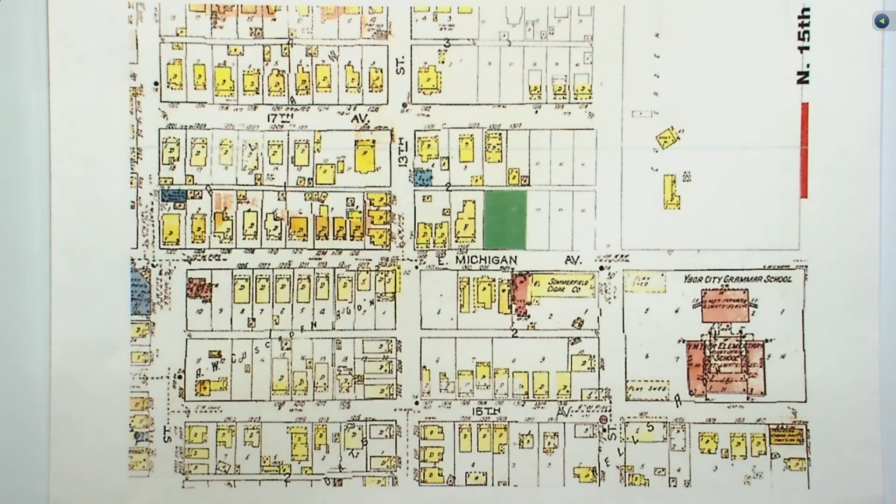Going through a quick photo presentation, this is the Sanborn map from 1929. The area in question is highlighted in the green parcel. In 1929, it faced Michigan, which today is Columbus Drive. To the west you have 13th Street, and to the east you have 14th Street. To the back of the parcel, in 1929, there was an alley.

Going to a more current overhead, you see the large parcel in question. It's a little larger than what we're normally looking at. We have Columbus Drive in the foreground. The alley has been vacated, so there is no alley, and all vehicular access has to come off the primary street.

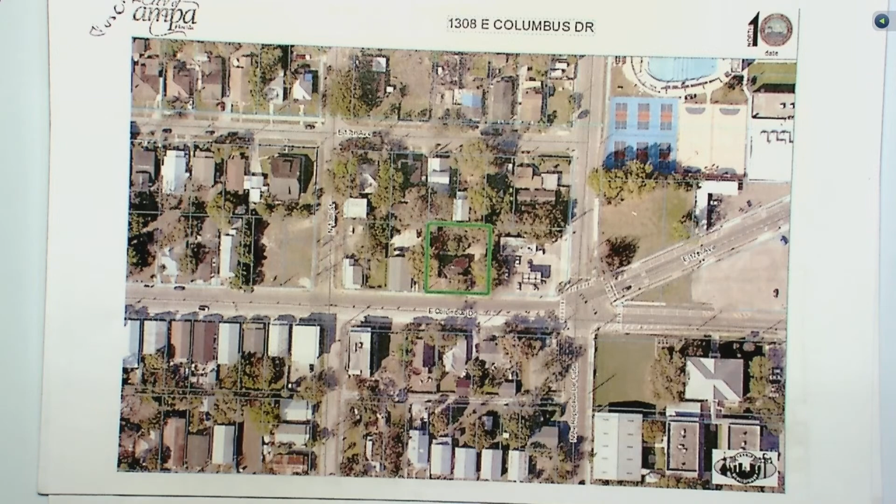This is looking from Columbus Drive back into the subject site. There are some trees in question. Natural Resources have looked at the site plan that you're going to review this morning, and it is suitable for an approval.

To the east, you have a convenience store. To the west, you have a duplex that this board reviewed and approved. Directly across the street, you have some fabric that's indicated on this photo. And to conclude, a couple of street shots: this is looking down Columbus Drive towards the east, and in the other direction, Columbus Drive to the west.

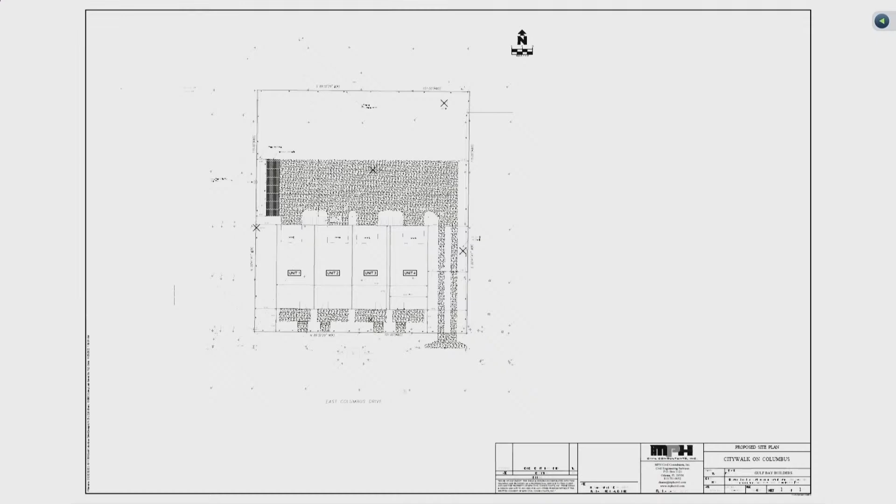The site, if I may, I also have some larger boards I'd like to put up. The front setback is aligned with 1306 Columbus, which was a project we did a couple of years ago. As Ron mentioned, the alley's been vacated, so our access is through a ribbon drive on the east side of the property. Parking and garage access are in the rear. Because of the size of the property, we have a large green area in the back. The AC equipment will also be contained in the back of the property.

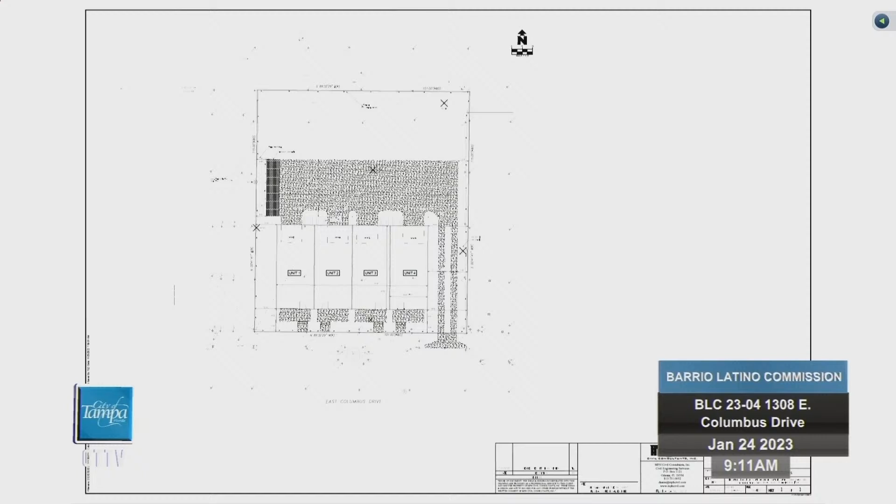It's kind of hard to tell, but a lot of the trees you saw on a previous slide will be removed because of their condition. There's a large tree on the property line with a severe lean to the west, towards 1306 Columbus. Staff recommended removal of that tree, and I've also spoken to the owner of 1306 Columbus, who was overjoyed, especially after the last storm went through — he thought it was coming down at that time.

This gives a perspective of, fortunately, the size of the property allowing a lot of green space. I've come before the board several times before where I didn't have the luxury of this type of green space. The finished floor elevation will be at 24 inches, exactly what the 1306 East Columbus Drive structure is.

The ribbon drive will have historic scoring of 3 foot. The parking area and drive access in the back will be scored with a 5x5 scoring pattern. On this slide, you can see some pervious concrete. There is one tree back here that we are proposing to save, and staff recommended the use of pervious concrete on the west end of the parking area.

We are proposing a fence; however, at this time, as with previous applications, typically we wait until we're a little further along in the project and we get with Ron and staff to present what we'd like to do for fencing. There also is a retaining wall. I'd like to move on to the next slide.

This is the front elevation. You can see we have some retaining walls that will be in front of each structure. We're still finalizing the design, but they will be either concrete or some sort of metal fencing.

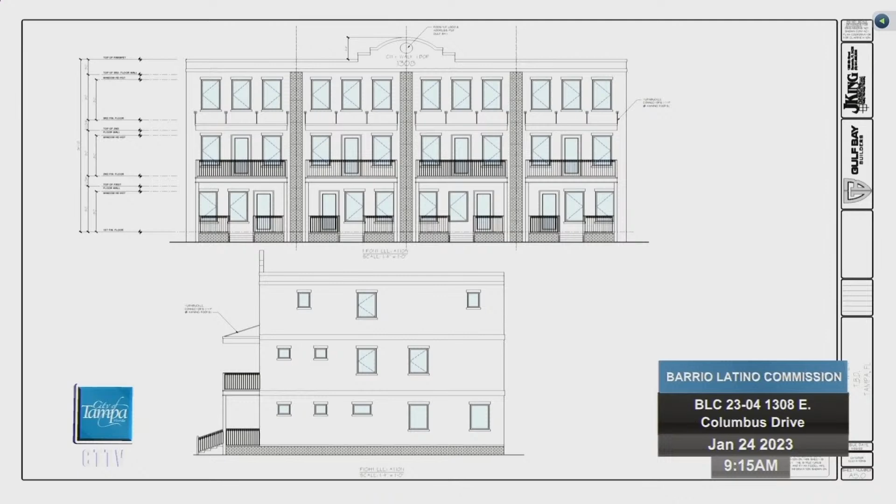So moving on, each floor is 9 foot with a 24-inch floor joist system. So the overall height of the building, leading up to our parapet wall, we're still below the allowable maximum height. Just more architectural details of the back of the building.

This slide shows that we're proposing to bring the brick around on the stem wall on each side. You can see how it wraps around the east side as well as the west side.

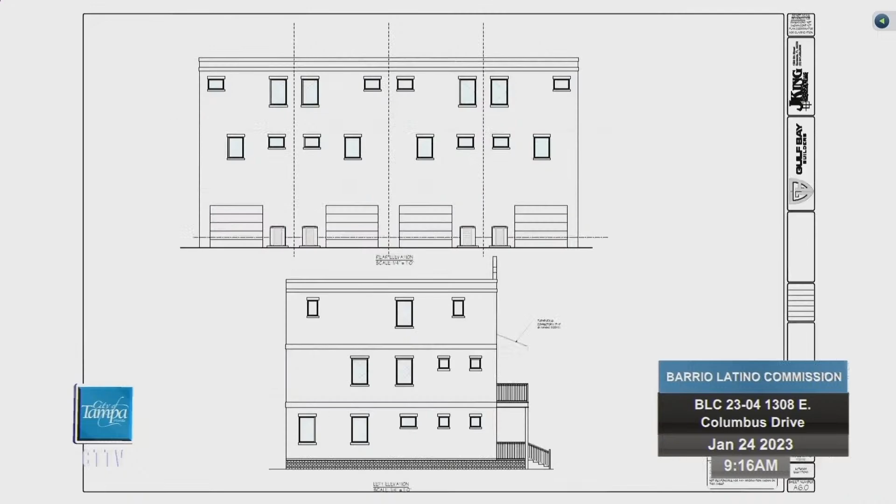Moving on—I don't know why that's upside down—but the building wall section shows the stem wall, our railing, and balcony system.

During some previous meetings with staff, it was mentioned that typically each building kind of had its own identity. So we've developed kind of a logo that we would like to have on the front of the building, tying in with the fabric of the neighborhood.

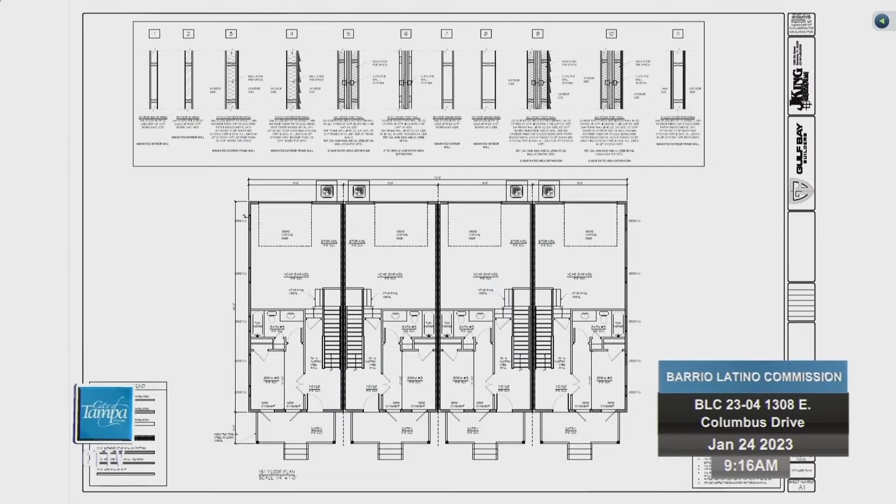This is just the floor plans.

Proposed building materials: we've used the Jeld-Wen windows on all of our previous projects. We're proposing to do a casement window, which would be a wood-clad window, and we've had very good luck with this. It's a customized window that we use for the Ybor district.

This is some of the materials we've used on previous projects. It's a Therma-Tru full light glass door, which would be 8 foot, and then we use the Schlage Century hardware.

The brick that we're proposing is a smokehouse. It's Hebron brick, and I have the sample with me, it's called Smokehouse. Sand finish stucco. And then the roof system, it looks flat from the front, but with the parapet wall it does have a slope, and we've used this VFI silicone system on our previous structures that are constructed this way.

We've selected the exterior color palette. The roof, of course, would be white—you can't see that from the road. The brick is smokehouse, kind of a gray. The exterior paint walls would be white snow, and we've used the exterior trim color, which is called tricorn. We've used that on some previous projects in the district.

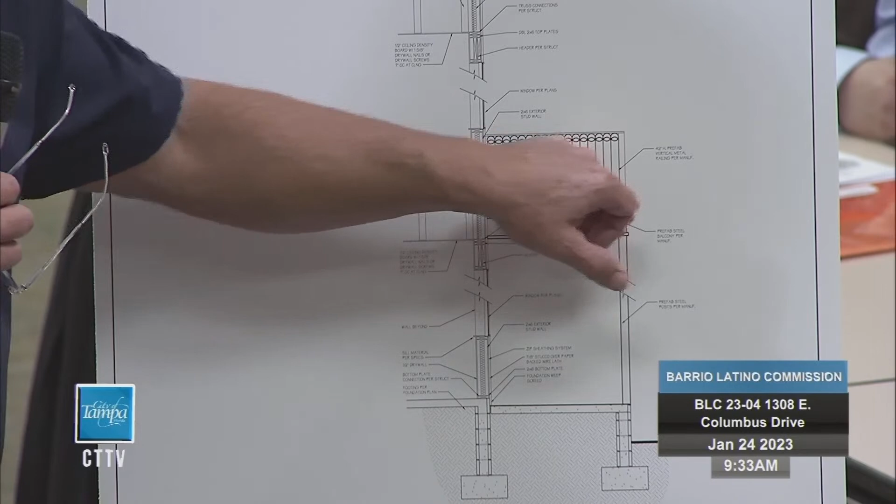And then we've got the brick that's going to be going up. The balcony system, again, is metal. We'll have some light gauge I-beams here. The railing system we've already decided on is something that we've drawn from some other projects in the district.

And then continuing up to the third floor, there again the windows and the exposed banding around the windows is quite pronounced. Coming up to the parapet wall, which is where we'll have this proposed detailing, kind of announcing the building and giving it some historic texture. It's kind of hard to tell from the renderings, but the stucco banding is quite pronounced, and there would be additional control joints in the front as well, besides just the brick.

Great, thank you. No further questions for me.

The only question that I have, and you may have discussed this and I missed it, was there's a notation here under the conditions to revisit operation of the window so as not to impede the porch use on the first floor. Can you talk a minute about what that issue was and how you addressed it?

So on the first floor here, there's two windows. We were going to make one of them a fixed glass window, and the other one would still be a casement window to meet egress. On the previously proposed plans, both windows were operational, so we took one into fixed glass. And that will be on all four units? Correct. Okay, that's all I have.

Thank you. And then what we did on the second floor is, because we have the door, these two windows would now become fixed glass as well, since we don't need those to be operational, as there's a door for egress. Thank you.

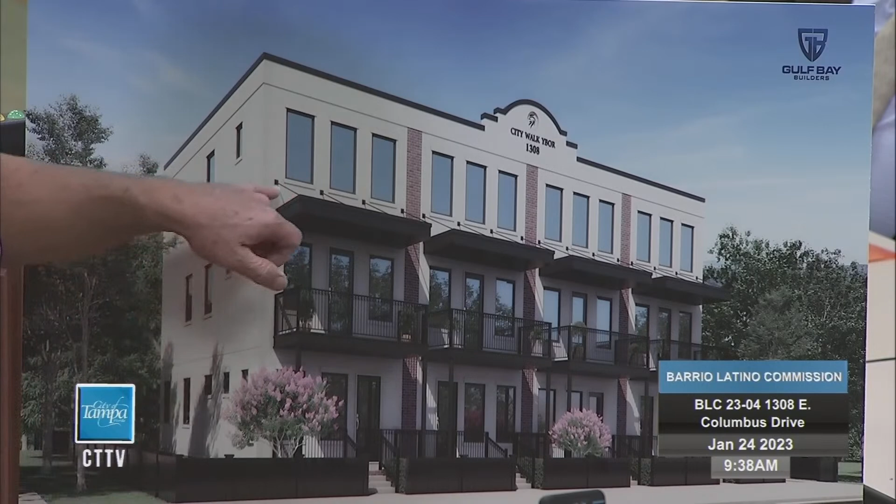In fact, I think Ron had mentioned that to me. We just have to be careful with this. Yeah, I think that tieback might help frame the front elevation a little bit more. It's either you have the pediment, and I know, I've seen your historic examples, your references throughout the district, and brick is kind of not really in there, but it's alluded to. I think that would be a good move to kind of tie it in and grab those corners.

So I see eyebrows, they're everywhere, right? You have the sills and eyebrows pronounced everywhere? Correct. I think,

Talk me through the process of wanting to do casement windows on this project. Just for the light, and looking at some of the inspiration photos that we drew on. And as I mentioned, these are custom built for us up in Pennsylvania that we've used extensively throughout the district. Just wanted to use casements. I haven't used them, and since a lot of these will be fixed glass, that's why I would like to use the casement just to get more light, especially on these end units.

Okay, wanted to try to get as much glass. Yeah, I think in general in the district, we typically see them more like 1/1s, like on that 3rd floor level. It just seems like it's a broad expanse of glass with no definition, if there's a top and bottom. Is that something they could do, like applied muntins or something like that? Yeah, and I think because when you look at your other projects, a lot of them are all 1/1s.

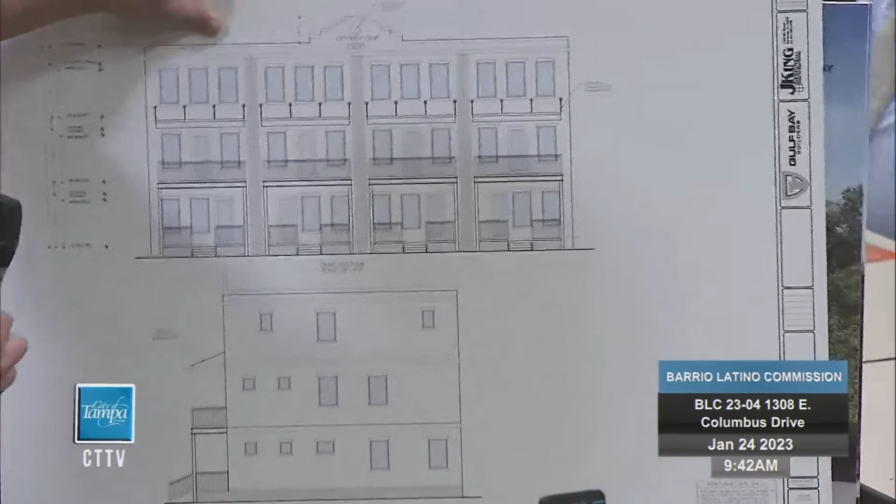Yeah, it's like starting from the left, you have twos on the bottom and then one going up top, and then when you get to the third series of windows, they're not aligned. It'd be nice to shift that over and work on it.

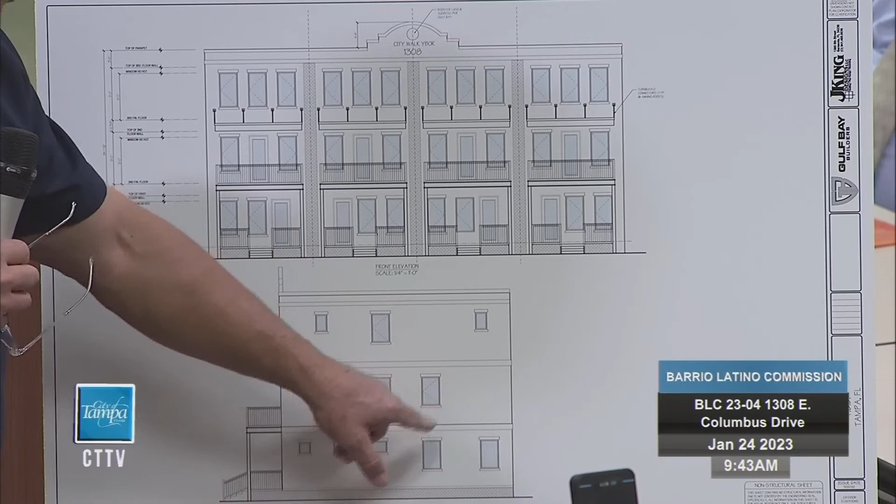Right, this window is on the third floor. There's 2 master suites on the third floor, so that would be over the commode area, just like this one is over here in this other suite. And then these are actually on the second floor. This is part of the dining area here.

Yeah, just like on the first floor, that small window, the third one doesn't align. This one here? Yeah, doesn't align with the two above, and it might be a simple shift over, and maybe that top right window. Okay, I see. Yeah, so I think that's something you can work with staff, you guys can take care of it, but I just think you might want to simplify that, maybe work on getting things in alignment a little bit more.

Now on your wall section, the casement windows, they look like they're front glazed and pretty close to the finished stucco. Is that accurate? Is that driven? No, they're a thicker... there's a thicker sash. Right, but the glazing here, like if you look at the middle one, the glass is all the way to the outside instead of being centered within the wall. And I'm wondering if that's a function.

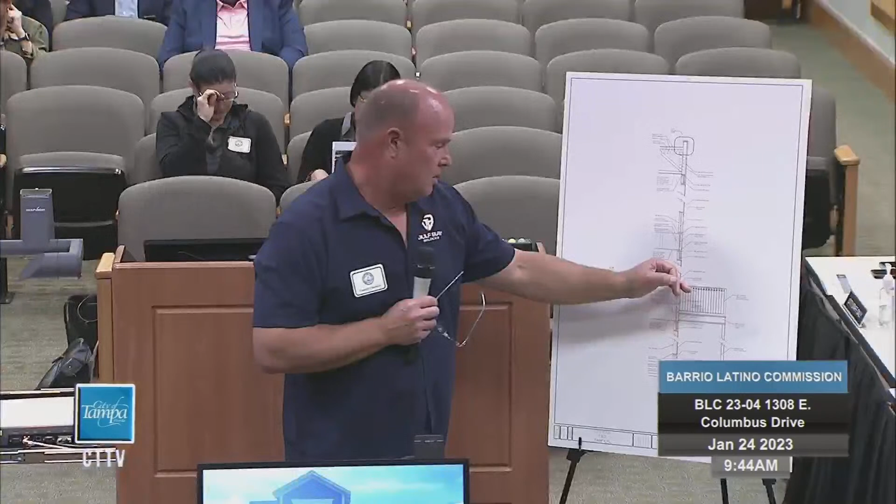No, the actual sash is going to be thicker than what it's going to protrude. Right, I'm talking past the wall. The glass looks like it's all the way out on the sash. Yes. So this, okay.

So you have a couple things working against you — you have a broad expanse of glass there, using the casement windows with no definition, no breaking it down to smaller units, 1 over 1 or whatever it may be. Plus you're pushing glass all the way up to the exterior, so that's gonna be a little bit too much, in my opinion.

So typically in frame construction, you'd like to see that glass more towards the center of that wall. That'll help not make the glass as prominent an element. Because you have two things — that broad expanse on the casement windows, and then you're pushing that glass all the way out. So I think a couple things could be done to pull that back into the building a little more, make it more recessed, give more definition and depth to the windows, and then maybe try to break that up into smaller units.

And all the windows are gonna be dark bronze, like the railings and everything else? There again, because they're customized, they can make them. Let me grab the...

A little handy dandy custom Goldwyn color. We were thinking either... they have just a black, and there's also... you kind of want it to match the railings and the balcony, correct. The ones you typically see, they call luxury bronze, but they also have something called chestnut bronze. But we'd want to get something a little bit darker than just the bronze.

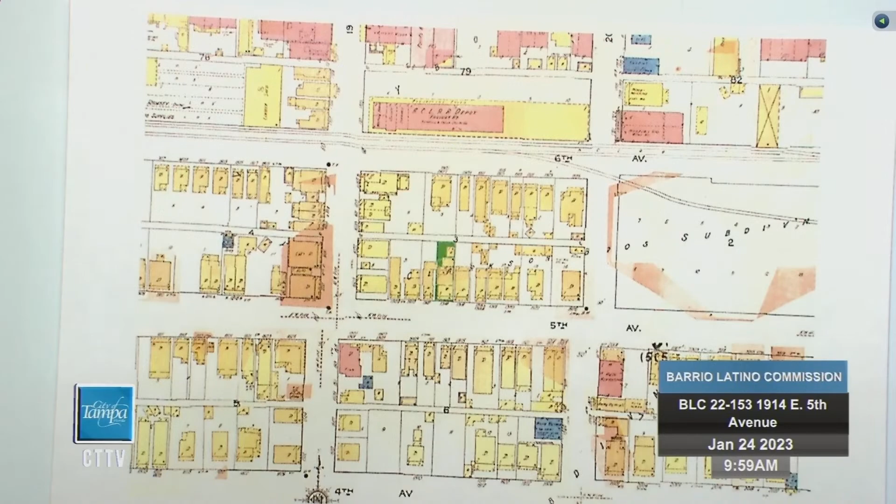Moving to the photo presentation, starting with the 1929 Sanborn map, the property in question is highlighted in green. Showing the fabric along 7th Avenue in 1929, you see the proximity of the structures to each other, the closeness and the urban environment. The property does face 5th Avenue. It's between 19th and 20th Street, which run north and south, and there is a functional alley. In 1929 there was an alley, and currently there is an alley today.

The alley is very important, once again, as it fulfills the travels of the vehicle. This parcel is only 25 by 95 in dimension, so to get access from the primary street would be very difficult.

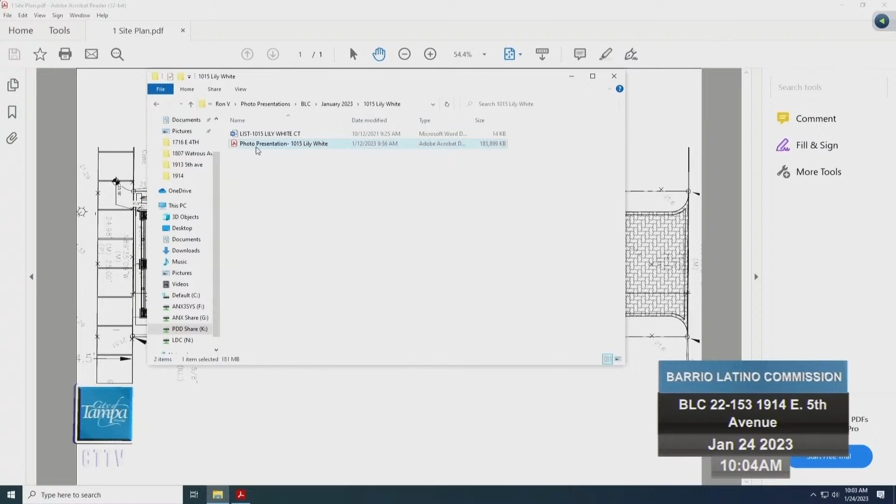The back setback will be 32 feet. The 32 feet that I took for the back setback was in order to have 24 feet from the complete alley and 18 feet for the car, so that a car can back up in that area. AC pads for the 2 units will also be proposed at the back of the unit.

There is an existing sidewalk in front of the property. The new sidewalk will basically be this connection you see here, because this part is existing. The sidewalk will just be this connection to get access through the side to the front porch.

The stair for the front porch will be 24 inches high with 4 risers and 3 treads. The front porch finished floor elevation will be 24 inches high. That is according with the average setback of the two houses located on the west side, which are 1912 and 1908.

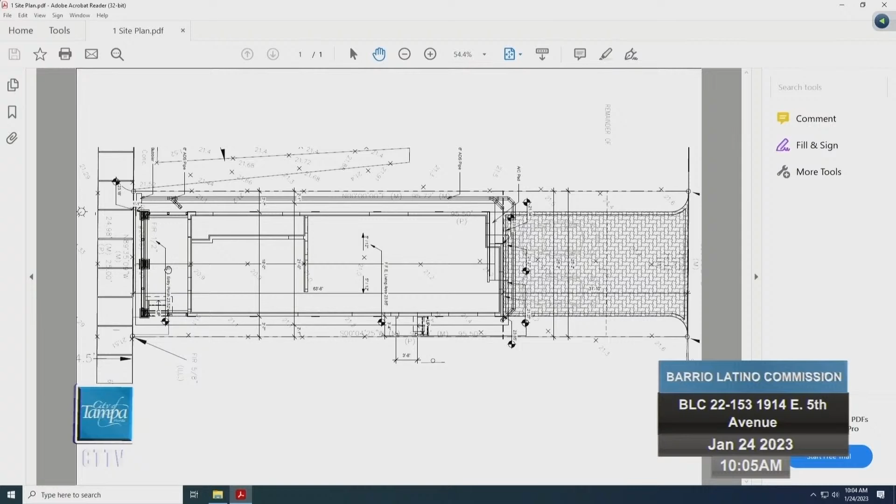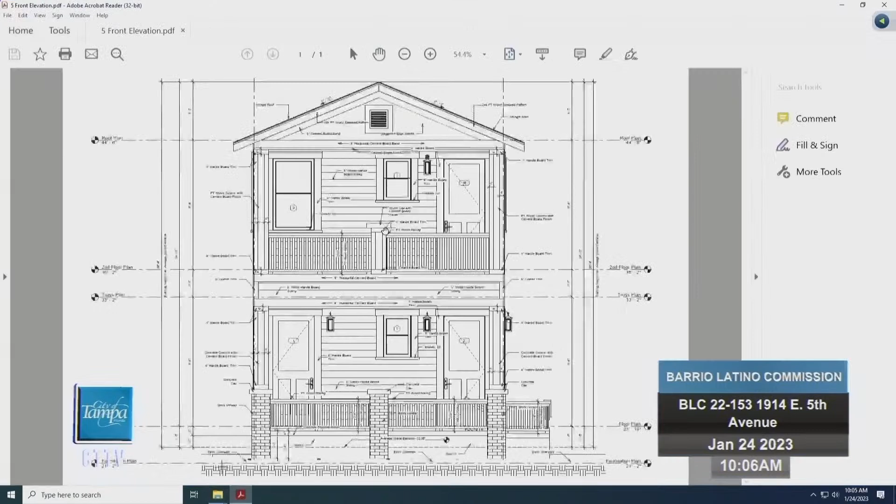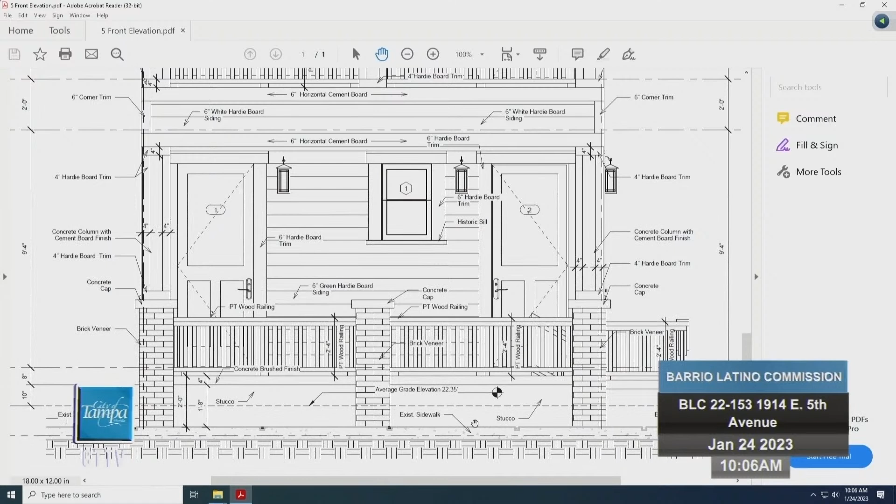I will go from the bottom to the top. Let me zoom this a little bit. Okay, we have 3 columns. 2 columns will go straight to the second floor, and the other column will be a half column. The columns will be brick veneer with a concrete cap, 4 inches.

The bottom of the porch will be a stucco sand finish with a concrete brushed finish, 4 inches above it. We will have a PT wood railing, and on the column in the middle we will have another concrete cap. The columns on the 2 ends will be 12 by 12 columns with a 4 inch trim around the whole column, on the bottom, on the top, and on the sides. The trims will be Hardie board.

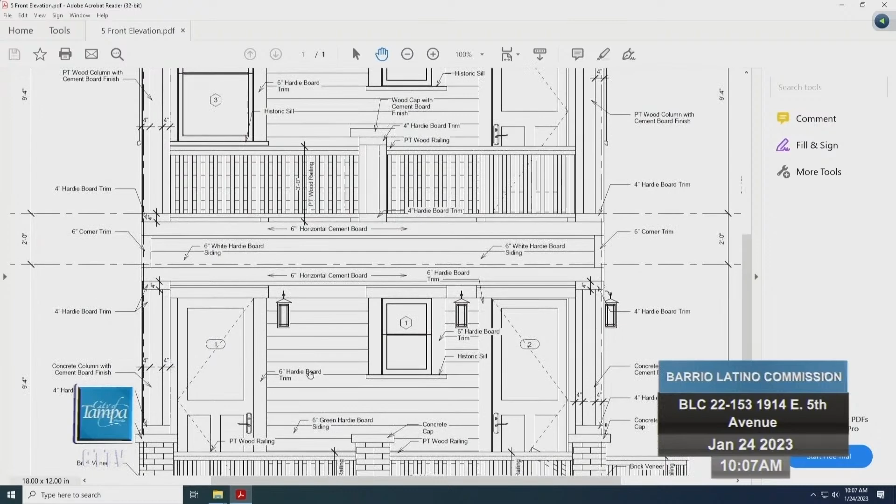We will use 6-inch Hardie board trim for all the doors and windows, and 6 inches of green Hardie board for siding. Going up, we will have 6 inch horizontal cement board that will be the trim for the second floor, and 6 inch wide Hardie board siding. The color of the Hardie board will be green, according with the palette we received from the Ybor historic review.

This is the trim for the windows, 6 inch trim. We will have a historic sill. We will have a PT column, but the PT column will be wrapped with cement board, and we will have 4 inch Hardie board doing all the trims around the column.

We will have 6 inch horizontal cement board on the gable, and a stagger edge Hardie board in this area. We will have the rafter here, exposed, with 2x6 PT. The roof will be shingle.

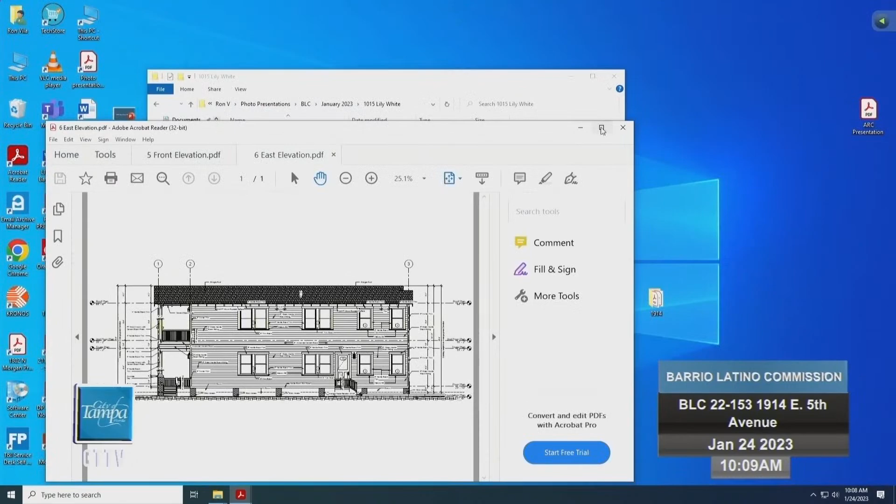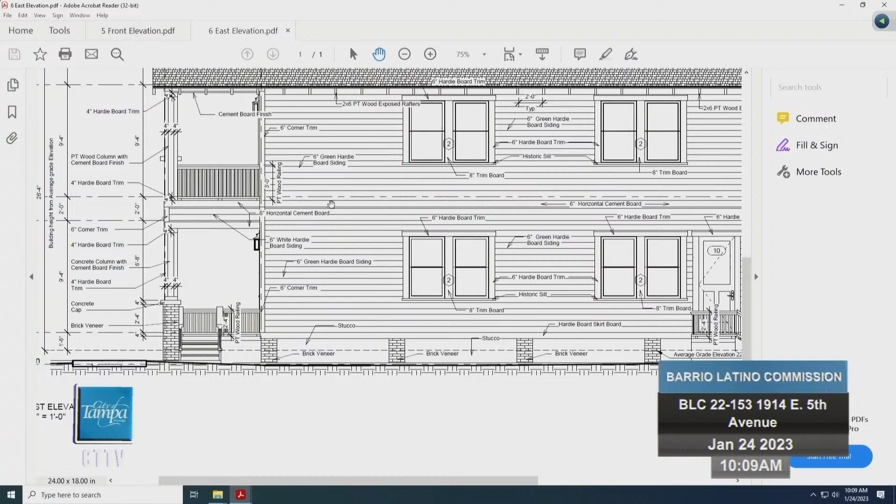This is the east elevation. This is the stair that you can see on the side with the same columns. We will have fake columns that basically try to emulate the columns for that type with brick veneers, and between the columns we will have a stucco sand finish. We will have the bottom skirt board, 6 inches, then the siding, then another 6 inches horizontal cement board for trim. We will have siding, trims, exposed rafter, and shingles.

This double window that we have on this side will have the historic sill on the bottom. We'll have 6 inches trim on the edges, 8 inches trim in the middle, with a 6 inch Hardie trim on top.

This is the side stair with the stair to go to the back, for the lanai to go to the car garage — to the carport, excuse me.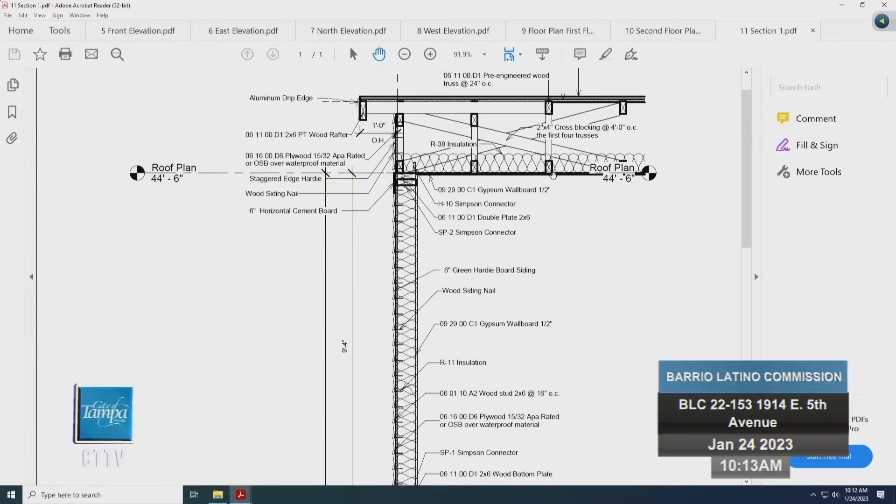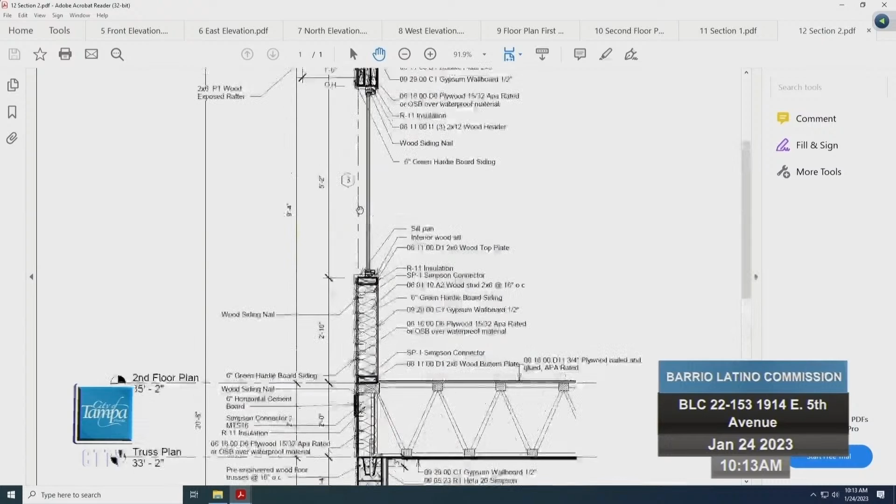This is another section. Will be exactly the same: historic sill, the trim, siding, skirtboard, siding, historic sill, siding, exposed rafters.

This is a section with the door, with the stairs, with the PT wood railing, and will be exactly the same thing: skirtboard, siding, exposed rafters.

This would be the construction of the columns. Basically it will be 12 by 12 columns with brick veneer, a concrete cap, a cement board finish of the column, and the trims around the column.

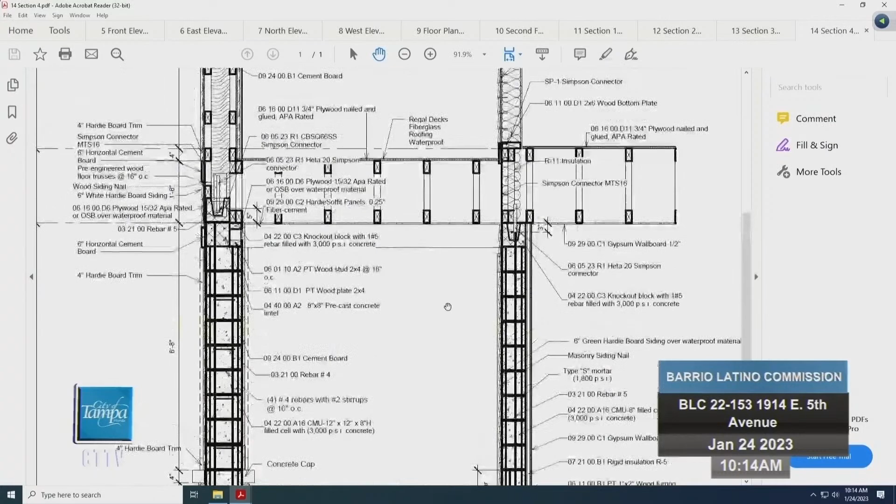On the second floor, we have a 6 by 6 wood post. We will have a 2 by 4 attached to the wood post to give the width that we need for the column. Then we have the Hardie board and the 4-inch trim on the edges of the column. On top, we have the staggered Hardie, and we have the exposed rafters.

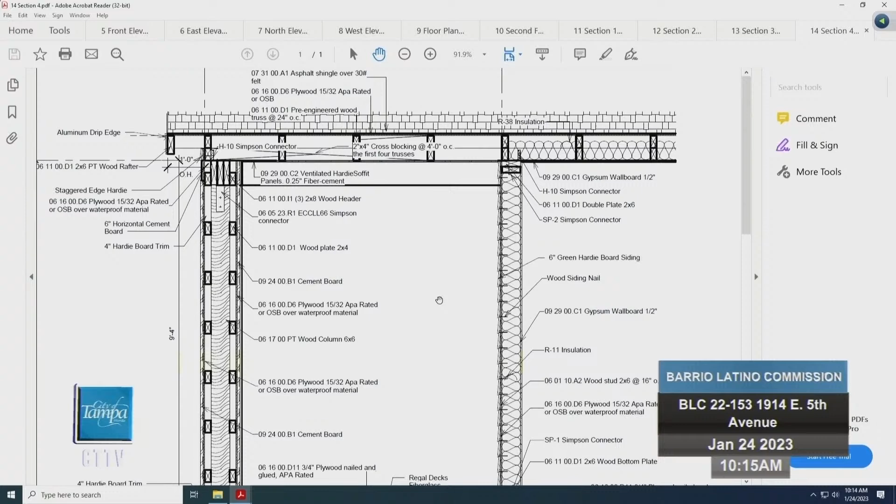This is the section on the front porch: concrete beam, concrete lintel, railing, PT wood railing, stagger edge, Hardie trim, shingle roof, and exposed rafters.

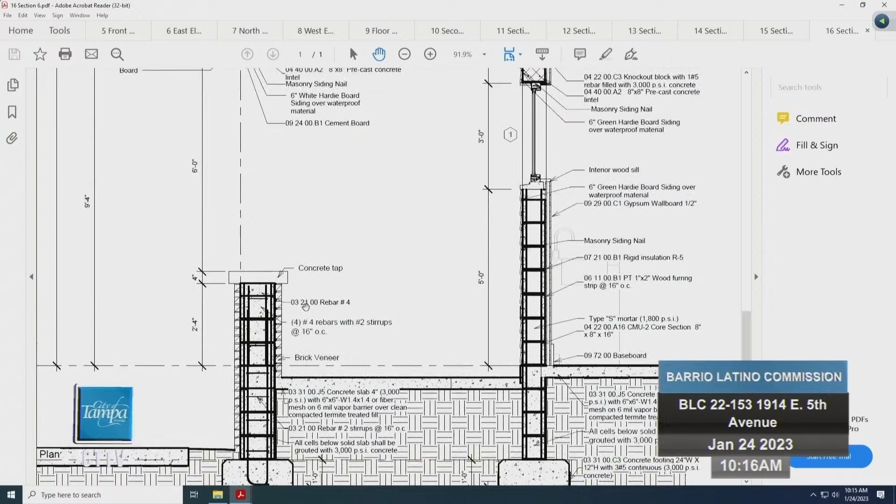This is the section of the half column that we have on the second floor and on the first floor. The column will be lower on the first floor for the style, and on the second floor we have to do the column with the height required by code. That will be basically 3 feet high.

This is a section on the porch. I just want to show that the trim around the doors and the trim on the corners of the building are not merged together, because I think that is the way it's supposed to be. I moved the door a little bit out of the corners to have this kind of finish. Basically the trim of the doors on top, on the bottom, on the side, and the trim of the wall is completely free.

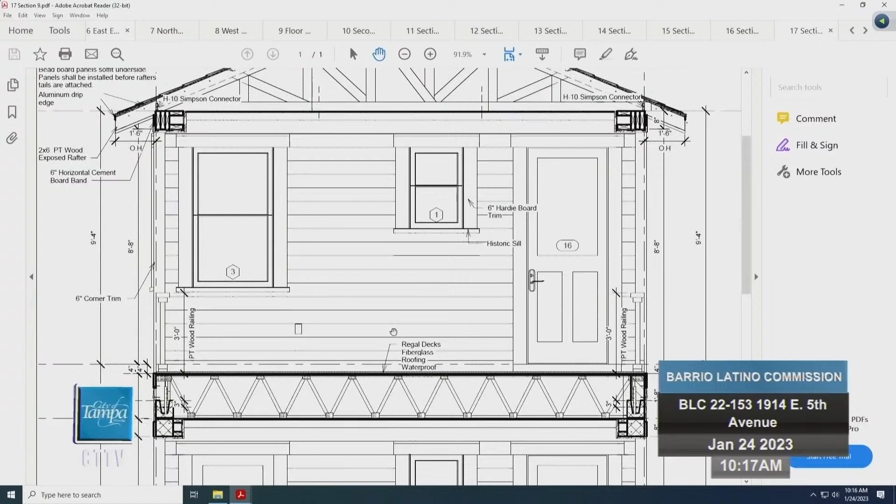These are the details of the windows. For the double window, that will be 4 inches trim on the sides, 8 inches trim in the middle, and 6 inches on top, with the historic sill on the bottom. For the single window, that will be basically 6 inches on the sides, historic sill, and 6 inches Hardie trim on top.

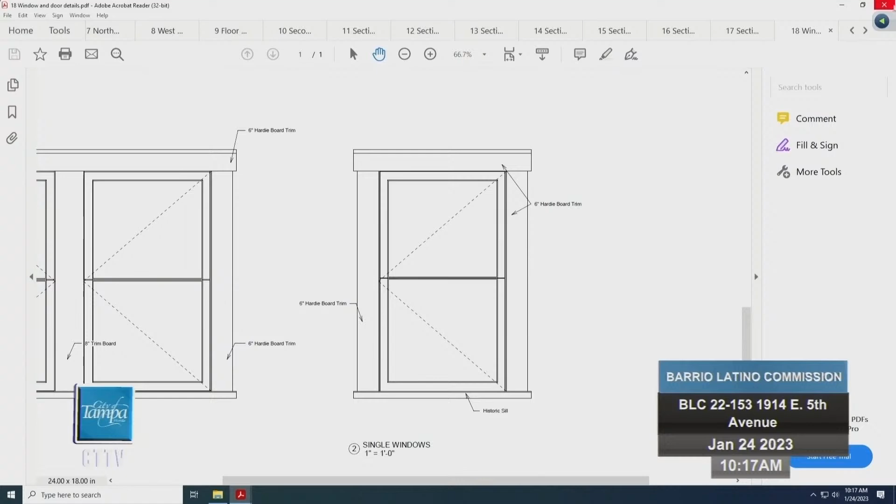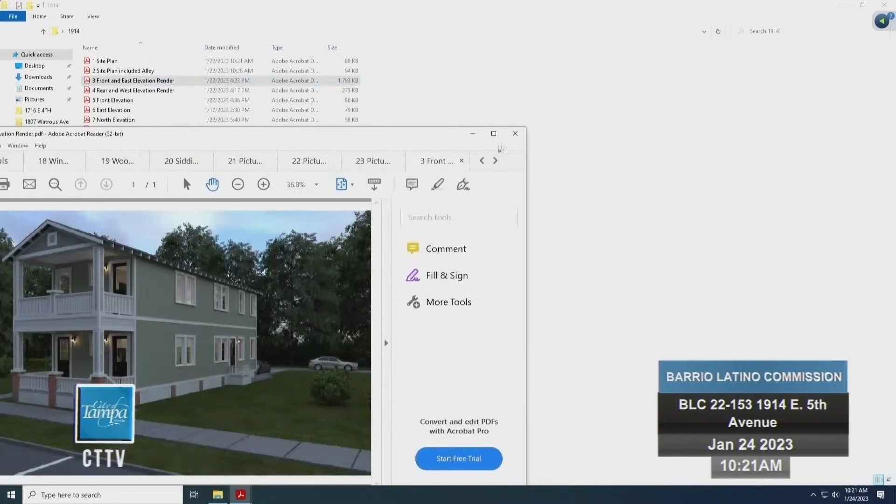I want to show you the brick and the siding materials, windows, and trims that we propose for this house.

The siding. We have most of the materials here, and I will show some of them, but any specific material that you want to see, we have basically most of them here. Yes, we'll put it here. It's a little bit hard to see. I think that we can put it there, yes? Yes? Okay. Zoom out.

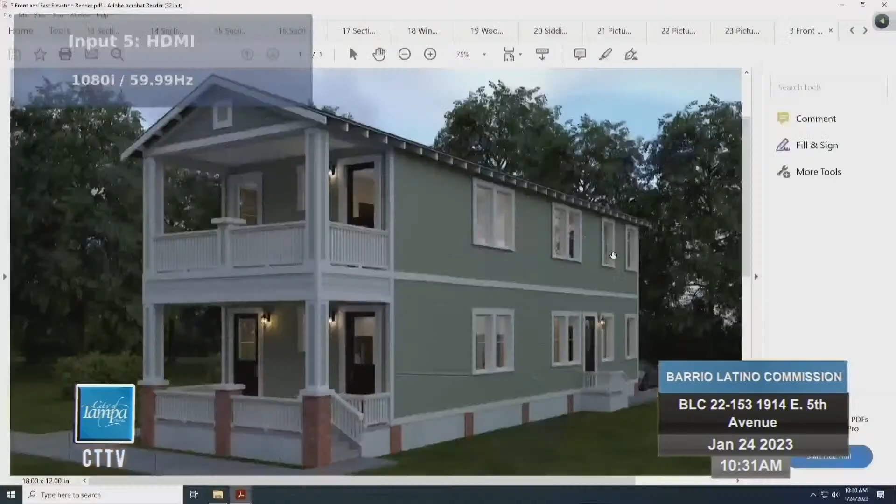Okay, great, thank you, no further questions? Can you go back to the previous picture? I have a question about the side door. You have a door on the side coming in from the garage or the driveway. Does that door access only the first floor unit? Yes. So the second floor unit has to walk all the way around to the front porch to get in? Okay.

And on that side door, have you considered any type of awning over it? I only say that because if I'm standing there carrying groceries or stuff in, I'm going to have to stand in the rain finding my keys to open the door. Just a thought, to put a cover.

The big issue I have is that the overhang cannot go less than 2 feet from the property line, and the lot is only 3 feet 7 inches, so maybe I can put something but it would only be 1 foot 4 inches, something minor—I can't extend because the property is too narrow. Wouldn't it be able to extend the length of the porch, the step area, further than the railing on the step? Just a thought, I'm looking at it and I understand the door issue.

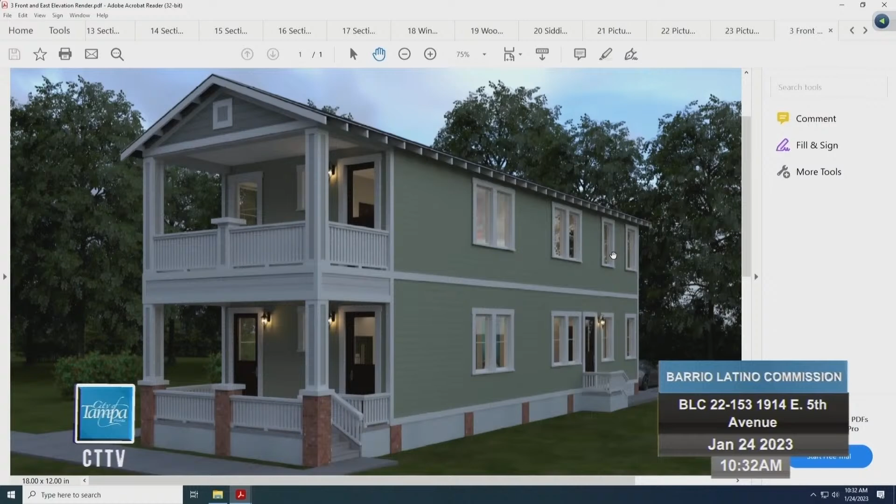The overhang's there, but will that... Okay, I did not realize that. And then, the other - somebody already talked railings. Okay, that's all I got.

I'll follow up with Ms. Welch's comment about that side door. It's unfortunate to live on the second floor because how are they gonna get there? They'll have to traipse through the mud, there's no direct route - either back out through the alley or cut between the houses. My thought is, why do you even need that second door there? Wouldn't it be better to provide both residents access from the front porch to the parking, get rid of that side stoop, and have a continuous sidewalk so they're both using it to get to the front porch, and from there go up or into the house?

It seems like it's blocking your access there to allow the first floor resident extra access and no access for the second floor. And then waterproofing issues - what Ms. Welch was talking about is providing a canopy or overhang over that door to protect against water intrusion. That door seems a little forced, it's close to that second set of double windows. You have enough room to get your trim in there, but I'd almost suggest getting rid of it altogether and having both parties use the front porch for access. You already have side access - extend that sidewalk up there, and then they both go in the front. It creates more issues than it's worth, but I understand what you're doing.

This here is our vicinity map. As I stated, W1 was already approved and in permitting. W2 starts at 4th Avenue. They've recreated 4th Avenue as it comes across the project. And to the south of 4th Avenue is W2, but only this small portion is within your reviewing powers. So you have to focus between Scott and Nuccio right in here.

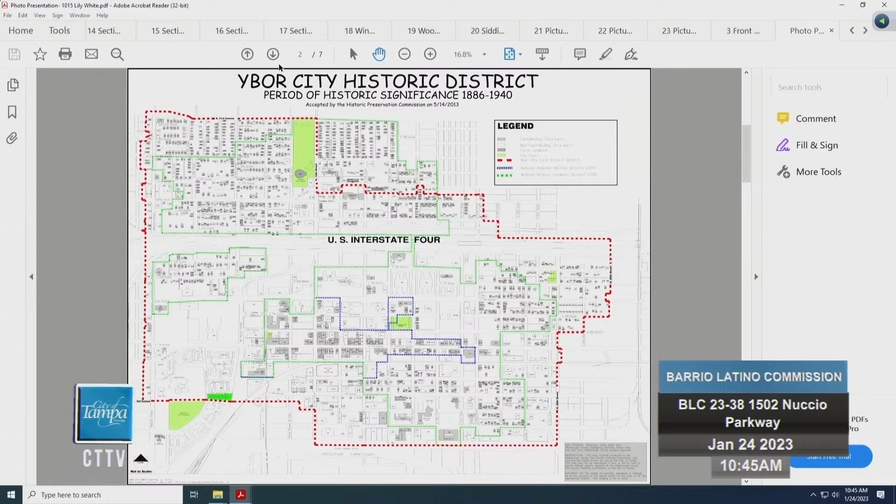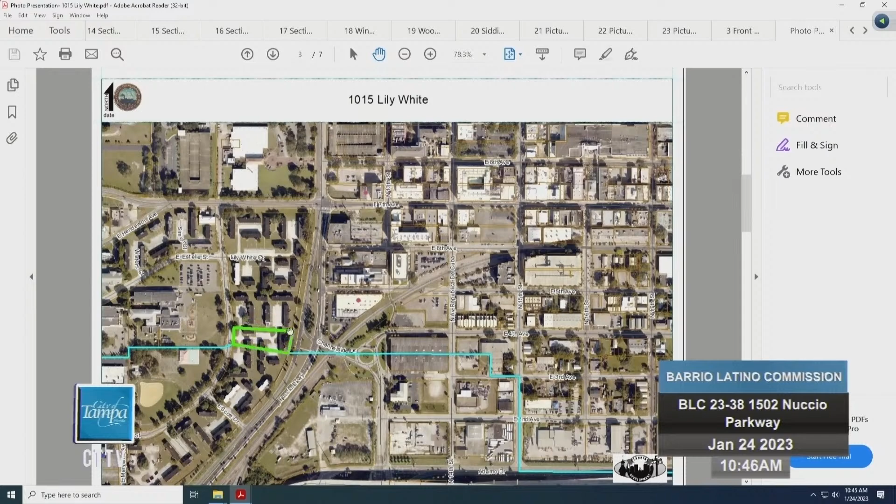This is another illustration to provide some guidance for you. This here is our southern boundary. This was a prior project, and this is attached to a larger project, but only this portion. This was the housing that was there, that portions of it had been removed, but just so everybody could get a sense of place. You see the vertical massing that was there that is no longer there, but I wanted to incorporate this into the photo presentation so everybody could reflect on the area in question.

That concludes the photo presentation, and I believe the agent will address the board at this time.

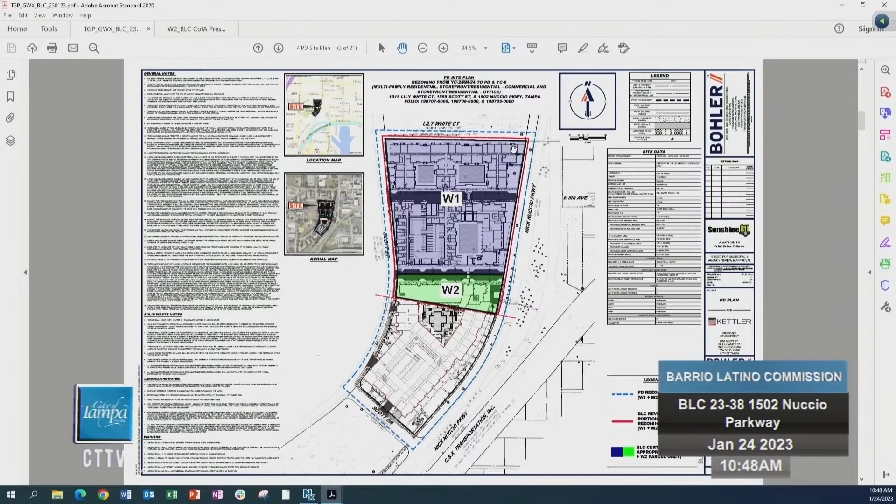One last note, we are going through a substantial change determination with the City of Tampa, making a number of small adjustments to the building design based on feedback we've received and things we think are all in a positive direction. Those include reducing setbacks and consolidating curb cuts, so we'll talk a little more in detail about that. Just wanted to highlight that, and note that everything we are in discussion with the city about, you are seeing today. So there's not going to be further changes beyond that.

With that, I'd like to invite John Fisher up to walk through some of these movements and then the rest of the presentation. John, I believe you have to be sworn in.

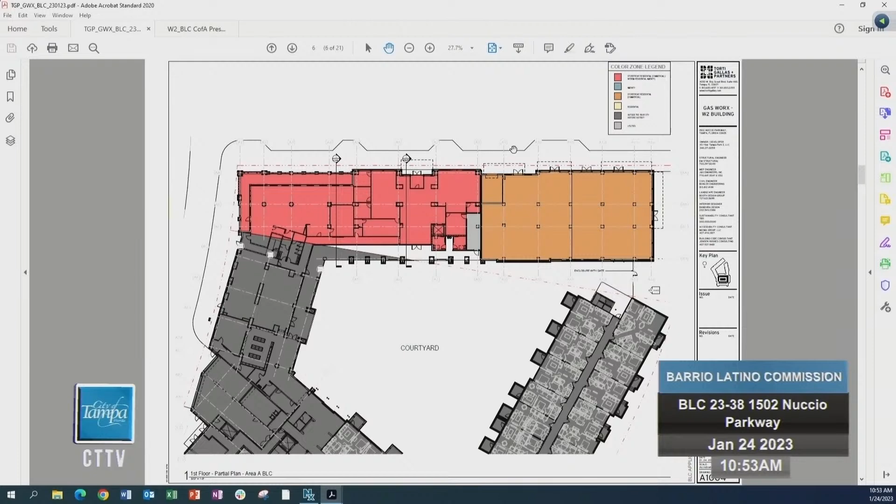And then the upper floors is all residential, and the yellow is the areas that are within the historic district, according to the line that we have on the plan.

You can see how the bridge breaks down, and as you come to the top level of the building it steps back again, and the blue is an outdoor terrace that is open to the residents to use.

You get these deep residential terrace pockets where the balconies inset significantly to give really deep shadow lines, which, as you go back to some of the historical precedents, you can see how a really deep balcony creates a really deep shadow, and you get those changes of light and tone across the facade. You want to keep that same character.

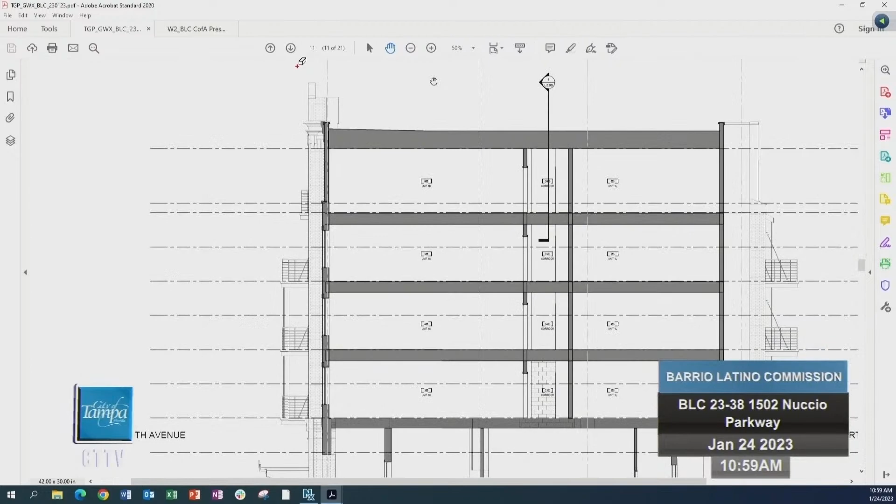Yep, again, sorry. So just going in and giving you some heights of what the floor levels would look like, conditions, as you can see here. So we did a few building sections just to give you an understanding of what the scale and the heights are in relationship from the commercial to the residential.

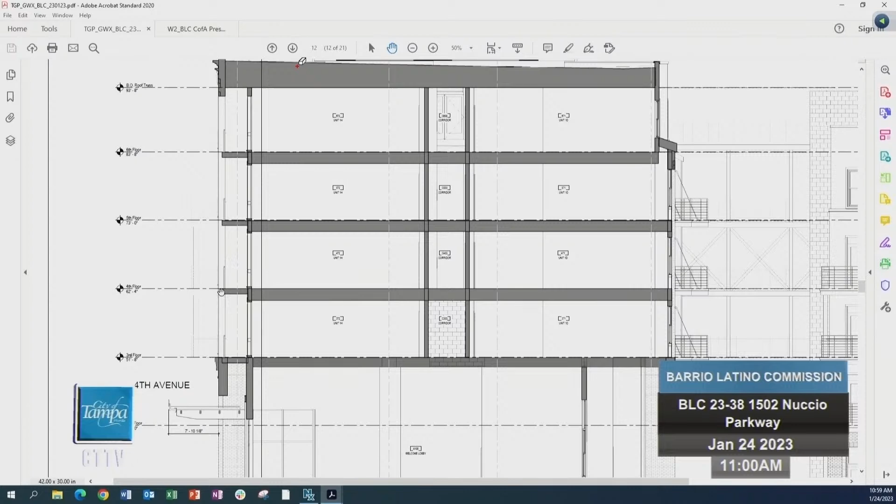And we gave another section cut here, just giving you some different perspectives of the different variations of balconies that we have. So we have some that are extended over, giving kind of like that Ybor 7th Street kind of atmosphere. And then we have some more that are recessed in for more privacy for the residential. They're all residential up here, but just giving different types of context.

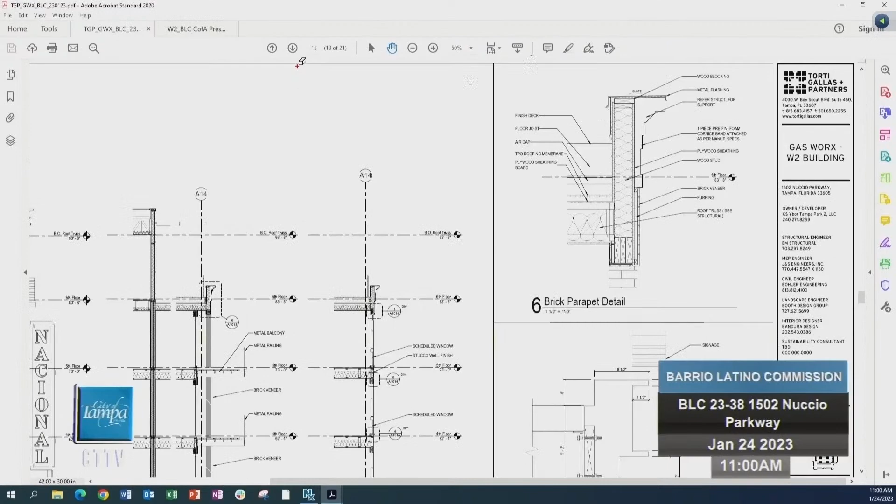Here, we just created some wall sections, and also gave you an idea of where these wall sections are. This is on the Nuccio side, so just giving you a little bit more in depth of how we're creating these parapet conditions. You can see here how we're going to create some of these profiles as well.

So as you notice, starting with the finish, so we have the brick veneer. We're going to be furring that out to give it a little bit more depth, a little bit more profile, so we could create those shadow lines with the windows or engage it with the door. We have the cornice, which will be a one-piece pre-finished foam that'll be attached, and we'll give it also the depth and the profiles to mimic that to a traditional aspects of a design.

Gave you some details of the canopies, and we also started providing what the canopy depths are to stay within the historic guidelines. So you can see some of the projections as well.

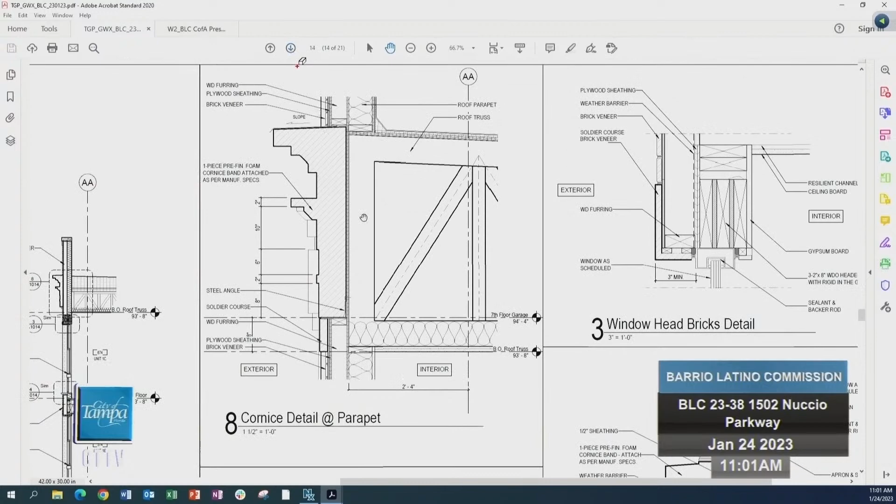Just another cross-section and a few more details on the corbelling as well as the other aesthetic features. This is on the Nacional, what we call in the facade right now, the main facade of the building. So some of the projections as well.

And also just to indicate here at the ground floor, as my colleague had mentioned, that this will be more of a masonry approach of the design on the podium. And then as you go beyond the podium level, then we go into the veneer, and you can see how we would follow the same depth and the same lines as the projections below. So there's a continuity between the two, even though the above levels will be in wood construction, the lower levels will be in podium.

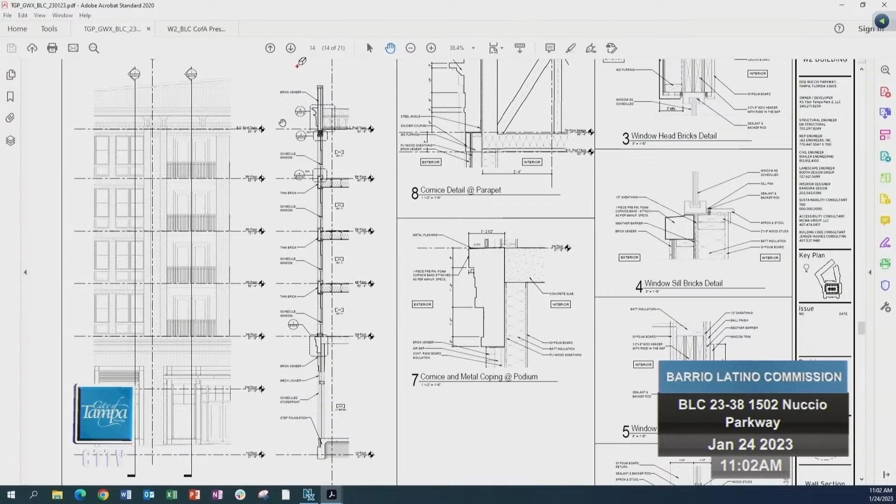Again, just another reference. This is at the depths of the internal porches.

Giving you a little bit more in depth of the details for the drawbridge, or for the pedestrian bridge. Just giving you some information here on the railings, as well as the foundations for the post.

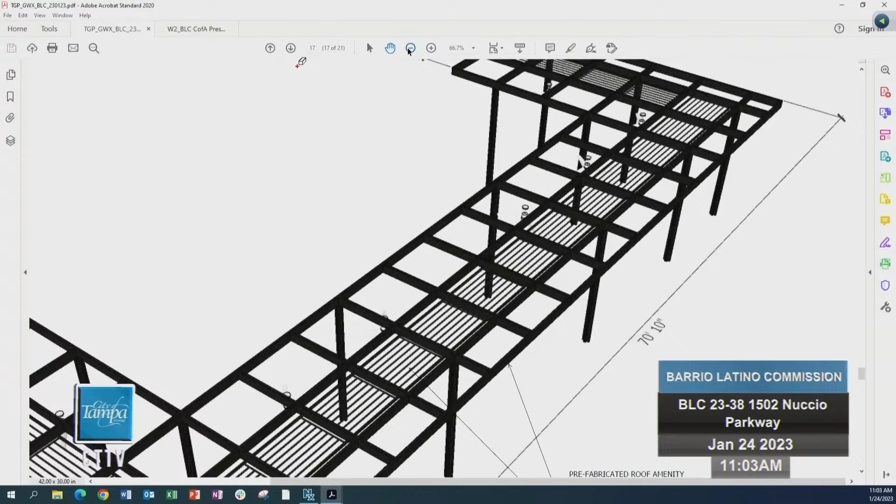This is at the roof amenity for the residents, just giving a little bit of this kind of context of the historic, but now bringing some of the new aspects of the design, but not trying to do too much and overpowering it.

So I'll show you a little bit more in depth on the renderings here. These are some of the other balconies, which will mimic very close to what will be designed on the W1. So there's a tie relationship between the two buildings, and some of the decking as well.

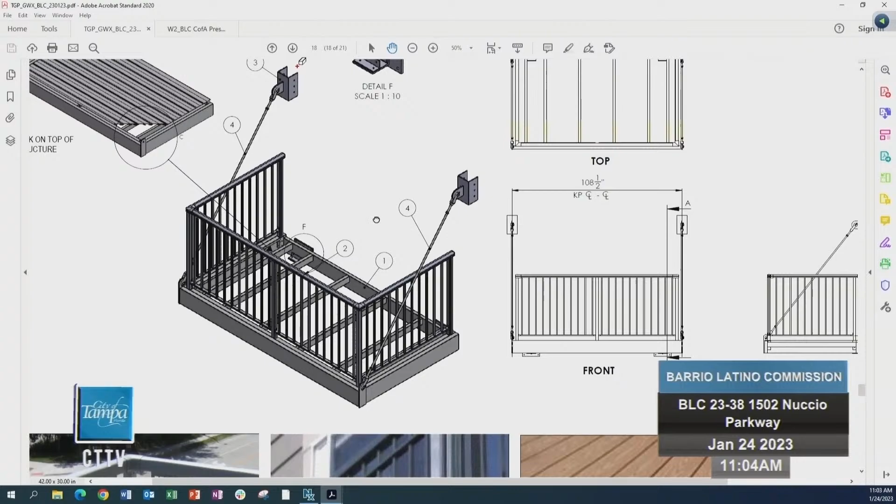And these are just some of the railing options that were taken into consideration.

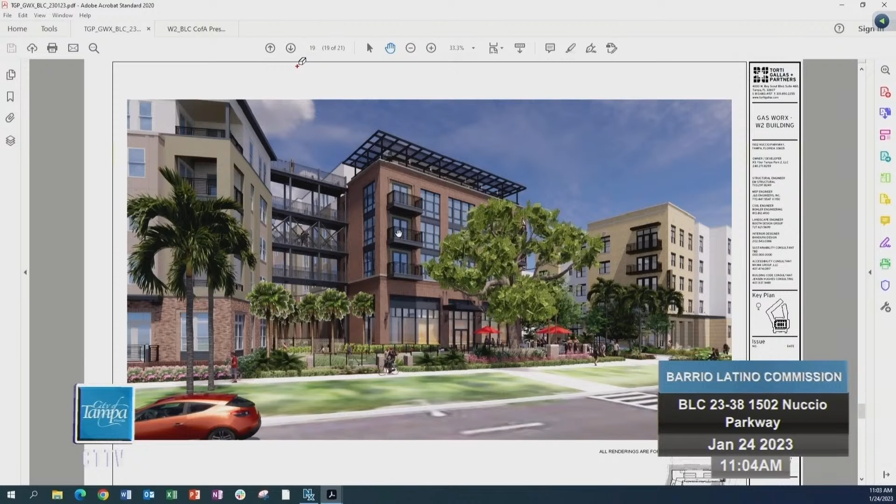And this is the facade, this is the rendering of what this would look like on Nuccio. And again, just emphasis of the pedestrian bridge to the roof terrace, and then to the facade on Nuccio.

This is the historical, or the existing grand oak that's on the site currently, so we'll be preserving it. And this is just another view on Nuccio. And this is the view on Scott.

Now I'm going to present Jamie, who's going to be discussing the landscape.

Hi there, Jamie Beatty, Booth Design Group. We're the landscape architect for the project.

So as previously approved with the W1, and for continuity between W1 and W2, we will be matching the landscape in between Fourth. We are currently showing the grouping of palm trees that were previously approved for the W1, and keeping with the live oaks down the block as well. So in between the two projects, they'll match each other.

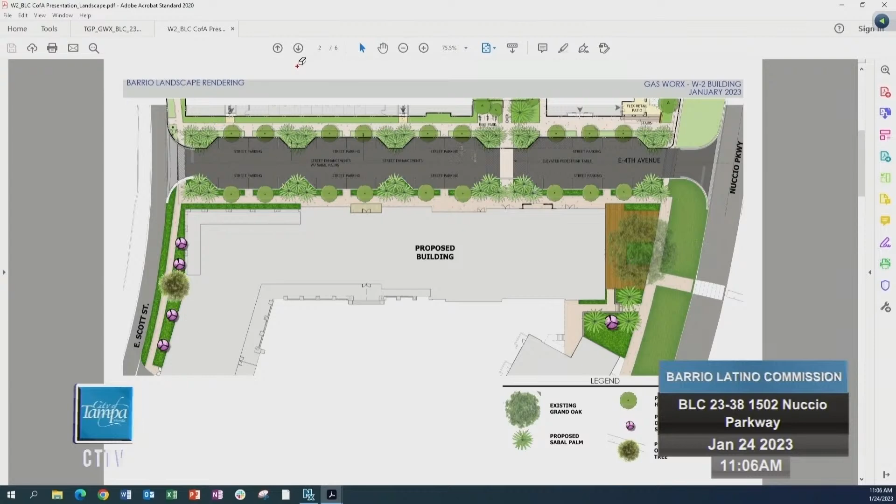And then some of the material along Nuccio and 4th Street, we'll have some nice precast steps to transition into the courtyard, and then the standard concrete to match the existing walkway that is in the Nuccio, which is technically a parkway. So we'll be repairing that and keeping that to match, and keeping with the guidelines that we have to.

Same thing along 4th, again, to match the W1 side, we'll have a concrete walk as well. And then one of the items proposed is the elevated boardwalk or deck around the Grand Oak to service the commercial portion of the project.

This will be raised and it would be built to preserve this tree. So it'd be elevated with a pier system that would keep it away from the critical root zone. And then we would keep very open railing along Nuccio that would allow you to see the building, as you can see in some of the examples we're showing.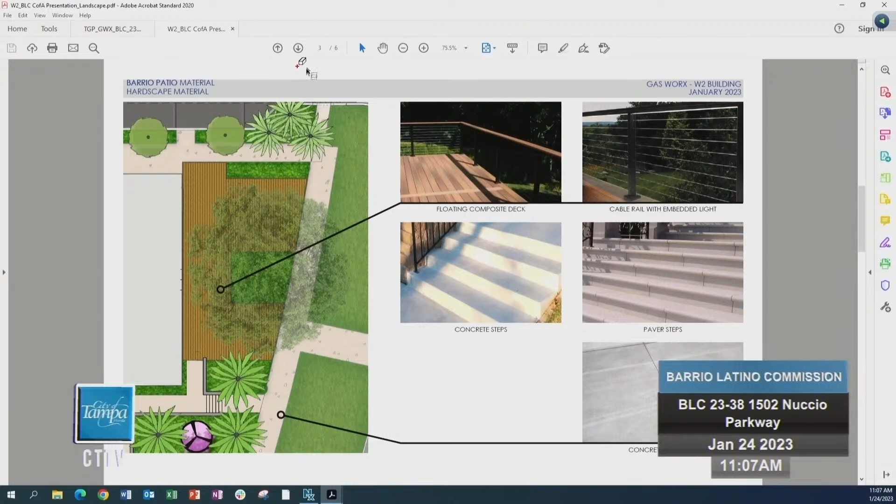Some of the site furnishings, well, let me start off at the top. Since the grades out here are higher on 4th Street, the deck will be raised, so we'll do a decorative screening below there. So along Nuccio, you won't see under a deck system, we'll have it screened in. We'll do that with either a wood composite or metal screen.

And then for the site furnishing around the site, we'll keep to some of the Ybor standards and the W1 portions that were approved with bike racks, bench seating, and the trash receptacles.

Then as well, we'll have lighting out here. We're going to uplight the preserved grand tree, and they'll all be mounted up in the tree to highlight that. And then we'll have some nice bollard lighting going down the walkway into the courtyard. That will be nice low lighting.

And then some of the species, sabal palms, Washingtonias, in keeping with what you see throughout Ybor, and then high-rise live oaks as well to provide shade along 4th Street.

So, and that's it for my piece. That concludes our presentation. We look forward to your questions.

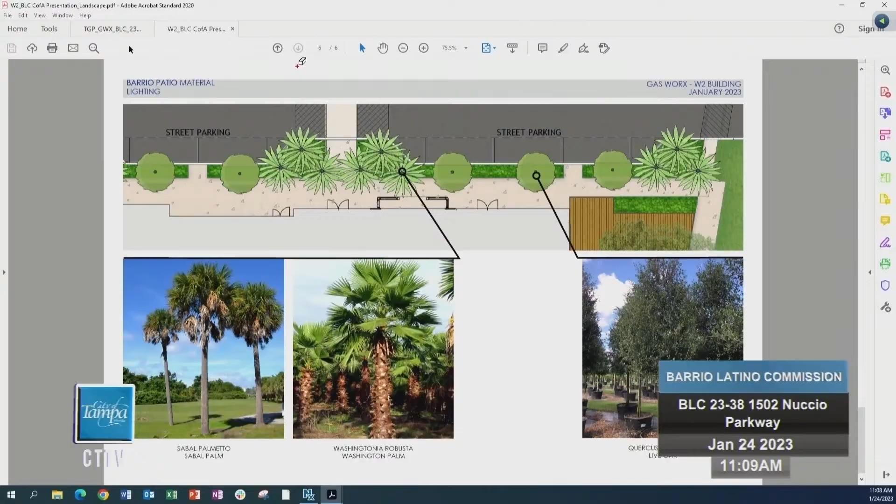Thank you. Ron Vila, staff with Historic Preservation. The staff's finding is that this application is consistent with the Ybor City Design Guidelines. As I stated previously in the introduction, this already received a PD approval through this board and city council, so the height, the facade width, the spacing and the alignment are already cemented, with the one exception being the setback. The setback currently has a minor adjustment to the footprint along the northern facade. That is going through a substantial change right now. If this is to move forward, that should be placed as a condition upon the final approval.

You saw a lot of details this morning showing the compatibility with the first phase W1 and how it expresses some of the historic vocabulary in the second phase that we're reviewing this morning. They referenced a lot of the period buildings. We had some concerns with the depth of the canopies, which were altered and reflected this morning, so they have the depth of the Ybor City vernacular, and the strengthening of the cornices as well that were illustrated this morning. There were some concerns prior to the presentation this morning about additional detail.

Those are called out on page 3 of your staff report, with the balconies, the metal railings, the bridge, the veneers. All of that information has been presented in their documents this morning. Some of the materials, the stucco patterns, have not been expressed, but they're there. If that's a discussion you want to get into, I believe all the information is here. That concludes my portion, and I'll be here to answer any questions.

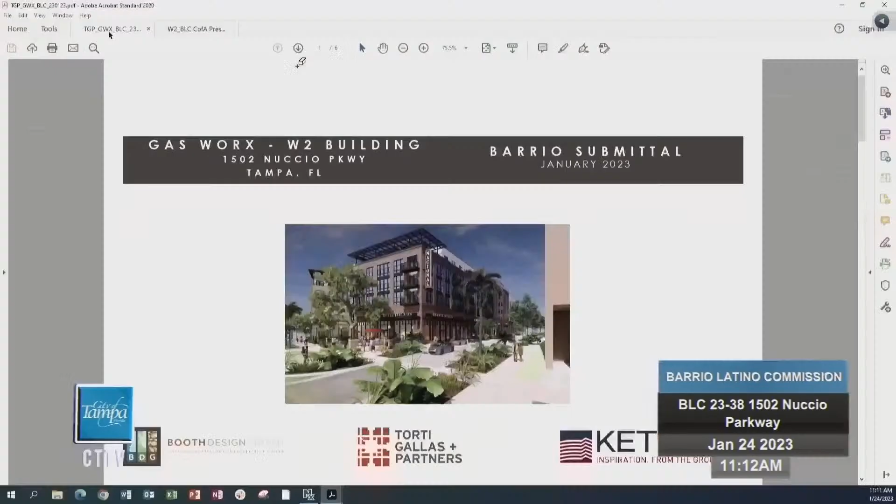We do show lighting around the perimeter on Fourth. I know the landscaper talked about it, but I didn't recall anything being spoken to on the building itself. So I'll zoom in here. We're probably in the process of finalizing which exact light fixture, but we do have lighting around each one of the storefronts, as well as the main one here, and we'll have ceiling lights in there, but it does wrap around on all the sides.

And then the other thing they've got noted on here is the hardware. What hardware are you going to be using on the building is the question. Have you come to that point yet? We have discussed it, so we are in the process right now of working with the door hardware consultant, who will have relationships of what's typically done on Seventh. We'll try to keep some of those aspects to it.

I'm just looking at the stuff that staff has identified that maybe you didn't talk about. The other thing they identified is signage and street furniture. Yes. They submitted a whole book of design standards for the whole project, so I think it would kind of fall in that. That would be kind of delegated back to staff to confirm that hardware, signage, lighting, and everything meets that criteria. I'm okay with that. That's all I have then. Thank you.

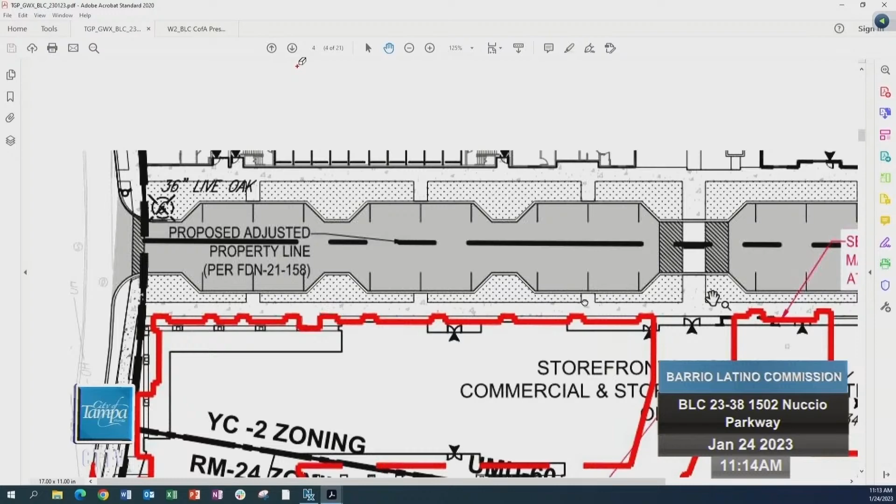Could we talk about that north setback again, just to make sure it's set back further than it was originally approved for? My understanding—here, let me just show you. On this outline, I know it's a little bit exaggerated, but you could tell from the wraparound, a lot of it was really impeding into that sidewalk. So we tried to give it a little bit of relief, kind of like how you typically see on Seventh, where you have a little bit of sidewalk and a little bit of internal space, so you can start separating yourself from the sidewalk into whatever kind of condition you're going into, either the amenity space or the retail side.

It just gives you a kind of separation between the two. The red is the original footprint, and the black is the new one. The red just stands out more, so I thought the red was the new footprint. Okay, thank you, that's clarified.

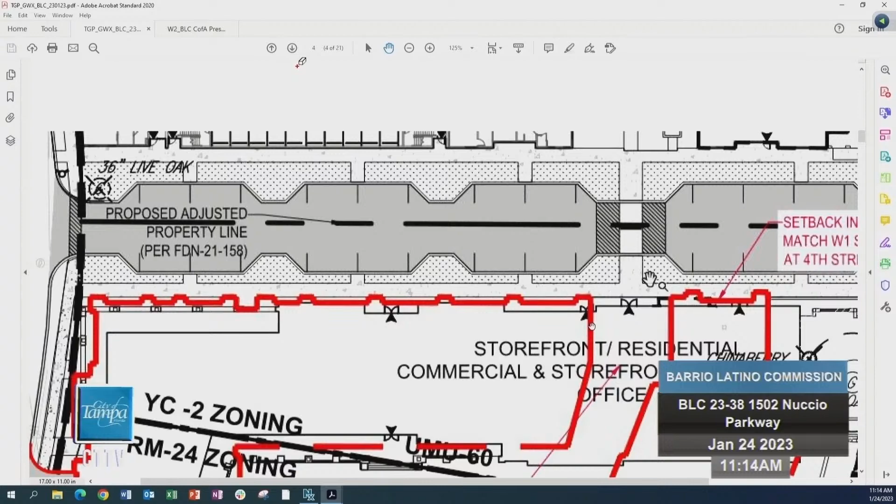Do you have any sort of section or elevation with the pedestrian bridge, just calling out some more detailing about it or anything like that? Yeah, I can go into it.

I know it might be pretty similar to what we saw from the previous project, right? Looks like it echoes quite a bit of the development. Yeah, we tried to do some similarity, but not exact. We wanted to create our own context and flavor to the design. So here we have more of a cross bracing kind of design element, because the W1 only had a single level of roof or awning. This has a couple different levels to it, so we had to think not only about aesthetics, but also structurally. We tried to also look at the context — one of the inspirations is the drawbridge downtown, which mimics that kind of character, and we're trying to tie in that relationship as well.

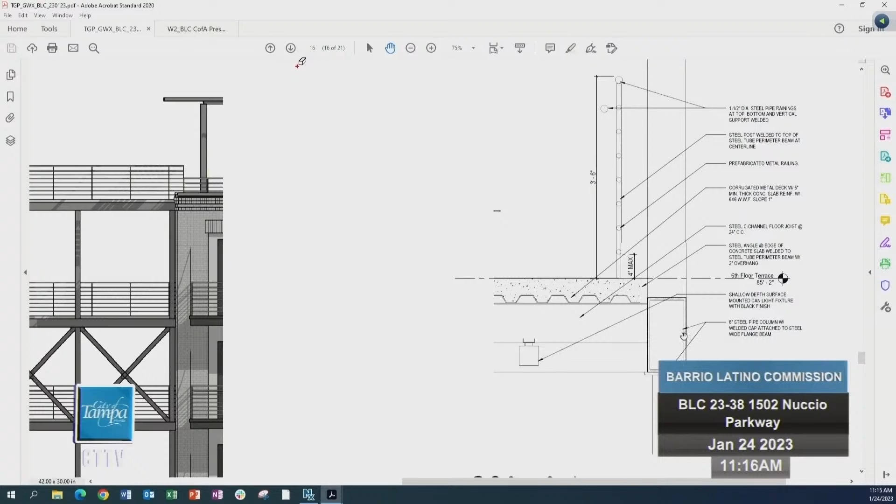Over here we give a little more insight — concrete over corrugated metal. We're doing this almost like an HSS tube steel, all welded to make the connections work for the pedestrian walkway. That's pretty much the inspiration behind it.

We also show a similar Ybor kind of design for the lights, like on 7th, but also celebrating some details from W1, which has a similar base. For the first two levels of the drawbridge, there are can lights. Is there any lighting on top of the bridge, or just rail lighting? Yeah, most likely just railings for pedestrians crossing, but we'll definitely provide some rail lighting. That's something we're working through with landscape. Great, thank you.

I don't have any comments or questions. Lily White right now is a court, so that's gonna go from end to end. That street is called Lily White, right? Well, that's the next street up — this is like Fourth, a new Fourth Avenue being created between W1 and here. Got it, okay, that was my only question. Thank you.

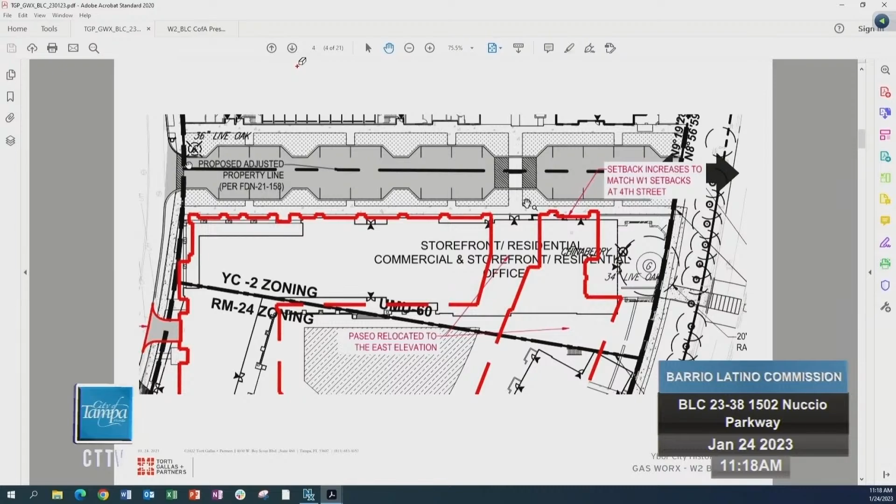I'll just make a comment — I think I said this on the W1 review too, about slowing the cars down along that road. I think there's a speed bump on the crosswalk in the center. Yes, right there. And then on the ends? There aren't raised pedestrian tables at the end of the roadway — I'm not sure you're allowed to put them that close to an intersection like that, but we could look into that. It's fine, there's something there before they turn. I know it's something we discussed last time, so I have no more questions.

Thank you, could you zoom out just a little bit on that? So the Paseo before was like a break in the building, right? And now you're just doing a continuous street front elevation. The Paseo's moving to the side, right, and that's where you're putting a pedestrian bridge — am I understanding that correctly? Yeah, I believe on this side we don't see that bridge connection from here, but that bridge is right along here.

Okay, how far is that pedestrian bridge set back from the corner of the building? Roughly — I know we have that 10-foot barrier, or at least 20 feet from there. I want to say it's about 25, yeah. Okay.

So you're getting a little bit closer to that live oak now with the new building, but that kind of maintains that street edge a little bit, and I think you're raising that plinth, so you have a bit more protection there. Yes. Can you go back to the first floor plan that's color coded?

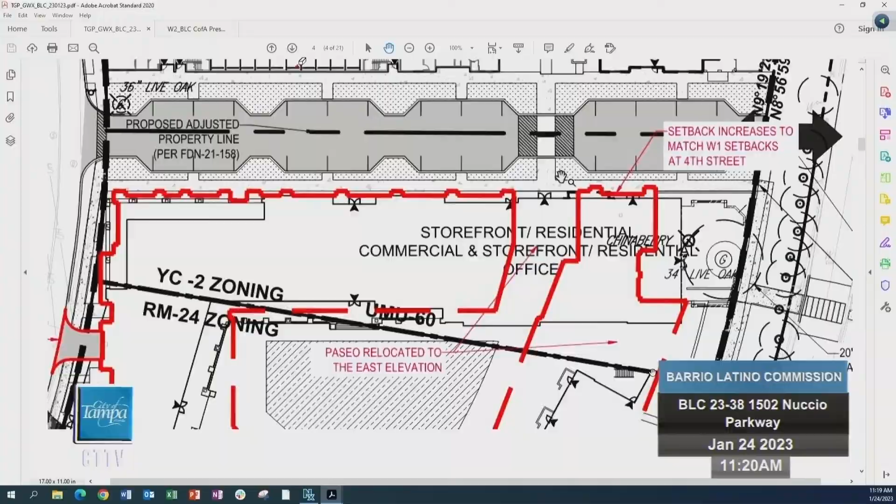So what does the orange mean, and what does the gold? Yeah, the salmon color we have designated as storefront, commercial. That's amenity, residential amenities - could be a gym, clubhouse, whatever - could be some retail. You could put retail or no retail there. No, we're more driven to put the retail onto the right side over here in this, that's orange.

Cool, so storefront, residential, commercial, okay. So you're labeling everything kind of residential, just because that's the primary occupancy of the building, and then you're kind of infilling that first floor.

What's the structure of the building? Is that, I heard wood frame, I heard steel, I see some concrete details. Is it a combination of? Yeah, the first two levels is the podium, so the exterior envelope will be in metal studs, and then the brick will be once you get up, then you're gonna go to stick? Yes. Okay, so you're kind of creating a two-floor plan and then stick above, okay. Yes.

On some of the plans, I noticed this one is called ground level, then the next plan is 3 through 5. So is level 1 and 2 the same or different? Is it a double height area, or are you gonna put any residential on level 2? Yeah, and that's what the building section was, to give some insight. So there's nothing programmed on that second floor, it's completely void. Elsewhere on that block is probably something else, but for this, it's just a double height.

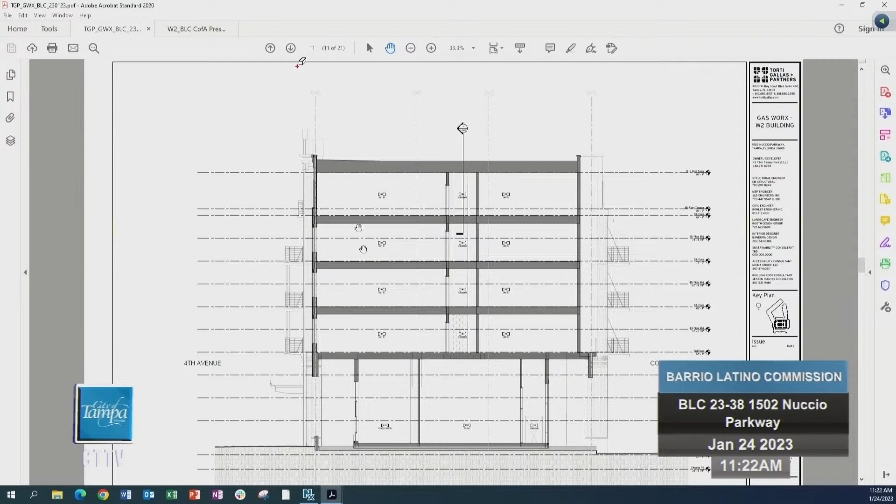Can you go to the front elevation? We'll cover a few things here. Sure, thanks for clarifying the structure, I was just trying to understand the details.

Okay, so right down there by, I think that's a medical clinic, you have that set of double doors. That's kind of where the pass-through was before, but that's not there anymore. That's just probably a back-of-house type of function or something right there, okay.

Yeah, that door looks a little lonely there, so you might want to detail it a little bit to bring it into the rest of the building. Right here, next to note 5, everything else is really detailed, but I think you need to continue that element over. I know you're trying to break it up - I went back to the original presentation to see what changed, and this is much better, it's kind of coming together, breaking down the masses and different elements to make the block more consistent, so I really appreciate what you've done there. Yeah, it's just that one door kind of.

Yeah, we're proposing to bring some of that Tampa environment, like a mural with the overhead, on an overhead door, kind of similar to what's on... No? Okay, you're not gonna put an overhead door there. You could, I mean, if you need to get in there, but not on that nice facade - you're not gonna put an overhead door there. If it's maintenance or something, there's other treatments like you have there, but it should be dressed up a little bit. Okay, fair enough.

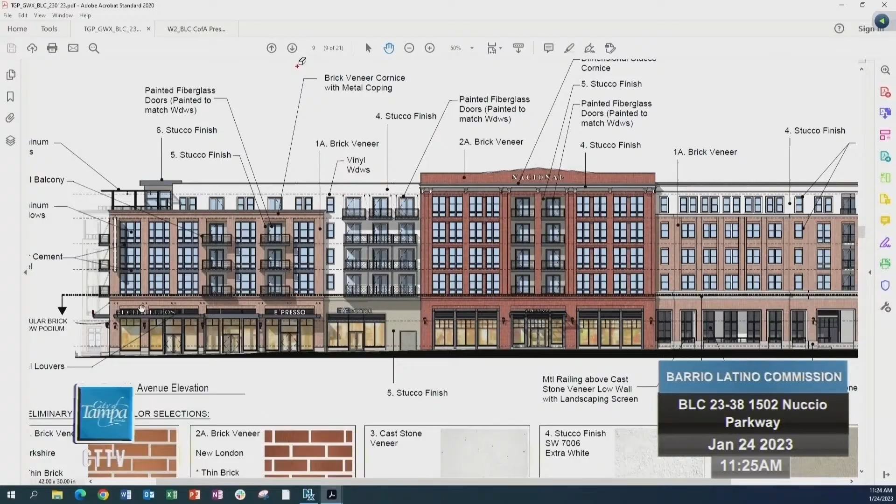So it'd be for exhaust air or intake or something? Yes. Would they be able to use it for a grease trap or hood exhaust? No, we're not planning to put it in there. We're planning to put a vertical shaft and go to the roof. Perfect. I get concerned with grease spilling out the canopy and dropping on people below, especially since the residents are there, so we would try to avoid that.

I like the project. I think this has a nice feel for it, nice rhythm. I think it's well detailed. Any other questions?

The door in question, I can appreciate the overhead if it's a service access or whatever. So what would be your recommendation? Because typically along 7th, delivery isn't intended through the main, and we'll consider this a main for all intents and purposes. So you either take it out and figure out a different access for back of house stuff, or go off the sides. Right, it just can't be on the main.

You don't see that on 7th or the main. You see it in some locations, but setback, or if it's a corner, put an inside corner, you can recess it and have a door to get into it. Okay.